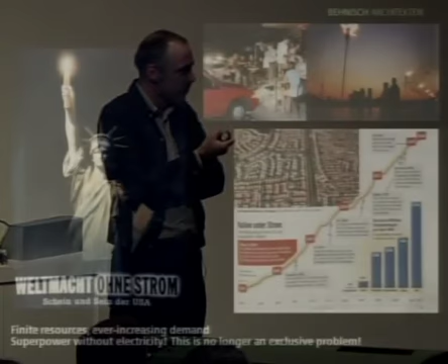And why are we talking about it? Well, some of us talk about it and have been talking about it for many, many years. But the headlines in the press, well, no one can avoid them. We all are now fully aware of the fact that we live on a planet with a finite amount of resources.

So we're encouraged to be good in our daily activities, or you'd like to think we're being encouraged to be good. The problem is that we can't really rely upon morals alone, and there should actually be incentives in place which encourage us to be good. What we've been trying to do these last few years is work out which incentives are actually out there, because then we can confront our clients with these incentives, and it will make our job a little bit easier in getting certain things through on our projects.

There were people who took the lead, or tried to take the lead, many, many years ago. There's Jimmy Carter on the roof of the White House. The problem was that within two years, Ronald Reagan had taken office, and he stripped these off, believe it or not.

At the same time, there were these board games, making the issues really apparent to the public, not just to the architectural community, but to the public.

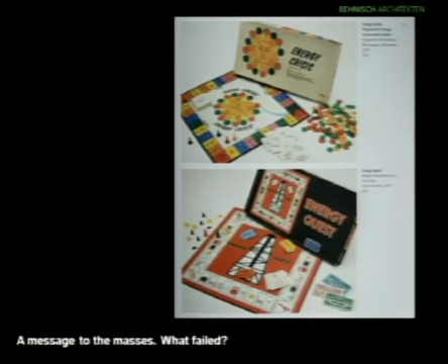What I'm getting at with this is it's relatively easy to use the S word. The problem is it's very, very difficult to actually respond to the S word in daily architectural practice. And it's even more difficult to convince the public at large of what that actually entails in the process of design and construction.

We no longer stop to listen, to hear, or to see. Our knowing so much and seeing so many unfelt images has drowned our sense of the appropriate. That's a great word—appropriate. I'm going to jump to information and disinformation.

Sue Roaf, I think she came and taught here, or gave a lecture here, at Oxford Brookes University. So I'm pointing out that she wrote this, and I didn't, okay?

It's no wonder our job gets quite difficult in convincing clients.

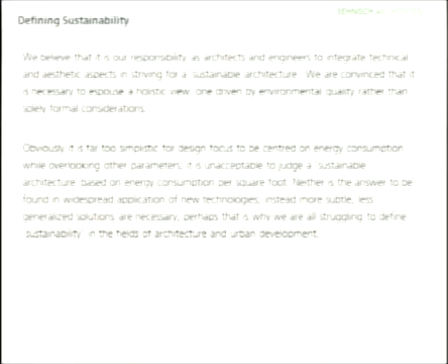I'm going to go past that one, and get to the slide that I showed right at the end last night. Because when I talked about the way that we work in the office, I was alluding to the fact that sometimes we as the architects, because we're in charge of costs and ultimately in charge of the construction site, we can literally conduct a relatively large orchestra over a 3, 4, 5-year period.

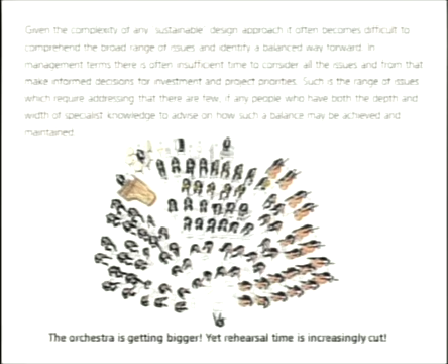The problem is that as soon as you start taking on issues, or you have to convince the client of issues relating to them, you have to take on, at times, more and more members into your orchestra. The problem we're finding, and I think all of our architectural colleagues are finding right now, is that the time we're given by our clients, or sometimes by ourselves because we're putting the time schedules together, to put the project together, to enter into and maintain a dialogue with the clients or with the local authorities, that time is being cut time and time again.

So one of the things I say at just about every lecture is, when someone asks me what I consider the most important aspect in each and every one of our projects, it's that: time. We have to be given adequate time to thrash out ideas which eventually impact upon sustainable design.

I'm going to show you some projects now that you'll have seen and published, and then I'll finish up with 2 or 3 projects that you haven't seen.

This is a project I showed last night. Since I think 95% of you are students, I want you to look carefully, not at the architectural forms, but at the materials we use on our projects, and also at the types of drawings we're doing.

We are not doing sophisticated renderings for the sake of renderings. We're trying to avoid renderings wherever possible. In my opinion, renderings are produced far too often and far too early in projects. A rendering reduced to the form of a sketch that gives an idea is great, but a rendering developed to such an extent that it closes down all avenues of expression or investigation is dangerous, because architecture changes from its inception through to completion. There are so many forces and influences that need to be taken into account after the original sketch. So what we're trying to do is be realistic with our clients.

In this case, this is the Ozeaneum. It's an aquarium, a teaching facility, a research facility - not just a fun palace like the thing down in Atlanta. This is a model, a tiny little model which was made quite carefully, then photographed even more carefully, and then worked on in Photoshop. It's just as good, if not better, than a rendering.

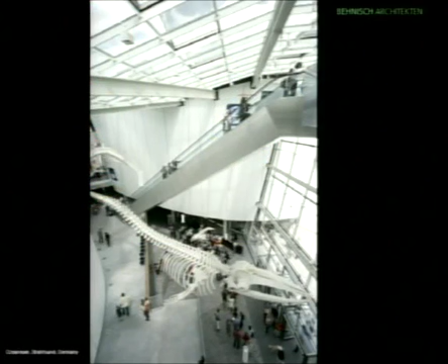The interior - look at the materials: concrete, plasterboard, steel, glass, and a bit of paint. That's about it. These buildings are not expensive. They are spatially sophisticated, but in terms of materials they are very, very robust indeed, be it a school, a bank building, or indeed a museum.

The architectural form is, of course, expressive. It's very, very different to the UNESCO World Heritage Site of Stralsund.

Back home in Germany, we're lucky that the working unions basically define the maximum floor plan depth. You don't have that here, so you end up with deep floor plans. And with deep floor plans, getting natural light and cross-ventilation through these spaces is very difficult indeed. So the rules and regulations back home actually make our life really easy. When you see this and wonder how the hell we did that - it's dead easy, because the rules and regulations are actually beneficial.

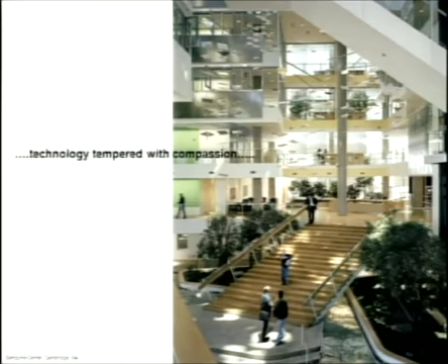So in the case of the Genzyme project, we literally pretended we were working in Germany, and we cut a hole out of a standard American 200-foot by 200-foot block and put an atria in the middle, so we do work with natural light and natural ventilation in a typical American office block.

I should have really shown a slide from Stewart Brand here. I don't know how many of you know who Stewart Brand is, and I'd encourage you to read his new book, which I think is called The Whole Earth Discipline.

Stewart Brand edited the Whole Earth Catalogue, the kind of hippie yellow pages of the 1960s. He then went on—he's a technology freak, believe it or not—and wrote a book I used during all of my studies called The Media Lab, about what goes on in the MIT Media Lab.

And he calls out in his book from the 1970s/80s, How Buildings Learn, for buildings which are robust, loose fit, and... what was the other word I used last night? Robust, loose fit, and not necessarily efficient—but we'll come back to that in a minute. Flexible, thank you.

Now, this is the TDCCBR in University of Toronto, which we completed about 6 years ago, working together with a practice called Architects Alliance.

We were given a site, if you can call it a site—it was a backwater, a cul-de-sac. I don't know how many of you know Toronto: this is College, this is the university complex, this is the big medical services building, a massive concrete bunker built in the 70s. There are a couple of small-scale historic buildings here, and this was our site. It's only 60 feet wide or something, and about 320 feet deep.

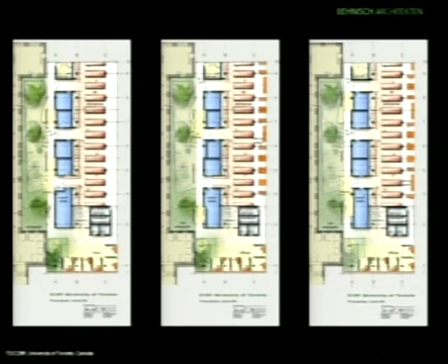But I think, even now, the building form is relatively unimportant. The lab space is shallow plan, so natural light flooding in is absolutely no problem. The nicest thing about the project is the relationship between new and existing—this is the new box, this is the existing building, and this is the space we created.

It's literally a found space. Previously this was used as a parking lot—no one paid it any attention, no one went into the medical science building or through the parking lot.

So we scrubbed up the old building, put a piece of glass over the top, left off the glass here, and created a wonderful communal space.

These are the staircases which are actually missing in this building—staircases which promote communication between the respective departments. I find it quite depressing that you have to go into the fire stairs to move between floors here; we have fire stairs in here too, of course, and if you're not careful you can end up value engineering such things out. But they bring a smile to people's faces when they're being used.

It's the interstitial space which has been turned into a winter garden—a really nice waiting area.

What I'm trying to get across here is we shouldn't be too precious with our architecture. We should promote extensive use, let people almost cannibalize their workspaces so they feel at home in here. I'm not suggesting that I would feel at home in here.

Toronto was interesting because it gave us a springboard with regards to lab design for the Harvard project.

Research is changing from day to day. We don't necessarily have biology researchers, chemistry researchers, physics researchers - everyone seems to collaborate on different projects nowadays. So in each building we have different project groups, and these project groups change in size and intensity literally from week to week. So we're trying to produce an inherently flexible structure, and within each of the structures we have kind of an architectural focus, and that's the communication room.

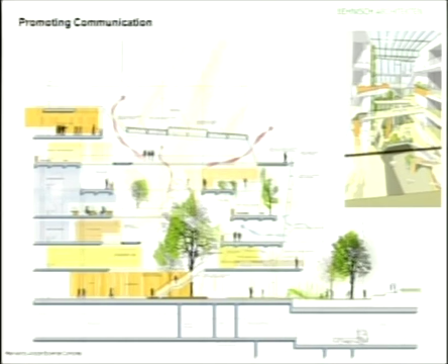That's a sketch model, that's a schematic design. Look at the sizes of the boxes on the roofs - these are the air handling units which any lab has to have, and these are the air handling units on labs which have very much reduced mechanical systems. Imagine how big they would be if we went with a standard approach.

This is a sketch, and it's deliberate - the rendering was actually much more sophisticated, almost photorealistic. We then decided to pull back. We decided that this was a DD, and it would be misleading or potentially misleading to show too much. The decisions still need to be made, and those decisions could only be made through a continued dialogue with the client. So we were still talking about what this material would actually be, what the soffit materials would actually be, what the materials used at roof level would actually be. We didn't want to promise too much too early in case we couldn't afford it at the end of the day.

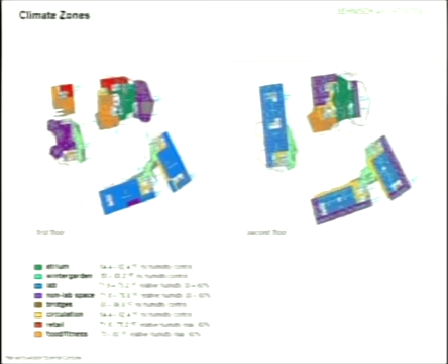These diagrams are interesting because with the help of Transsolar, we managed to change the preconceptions with regards to comfort. We looked at the possibility for rather large temperature and humidity swings throughout the building complex. If you can do that, you can downsize your mechanical equipment dramatically. Temperatures at certain times can get up to 96 degrees, but the reason we allow it is because no one actually occupies that space, or if it's getting up to 78, they might not be occupying that space on a continual basis. So we're looking at how people use buildings and then zoning the buildings appropriately.

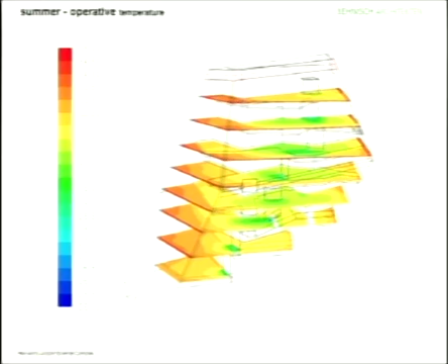So for example, 35 degrees, about 90 degrees, directly at the rear of the glazing in the atria space. Why shouldn't it be allowed to get hot there? No one can walk there, the floor slab is back here. If we can promote a certain temperature differential within these spaces, we can influence the way air moves through them, moving from the cool areas to the warm areas, heating up at the rear of the facade, chimney effect, heat recovery at high level. These buildings have different modes of operation: summer mode, winter mode, and hopefully in the shoulder seasons, almost in passive mode in say 3/4 of the programmed area.

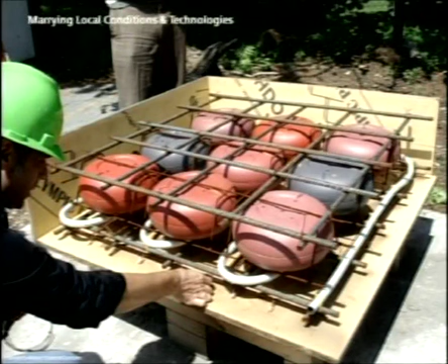I don't know how many of you know this, this is a Cobiax system. It's for reducing dead weight in the concrete superstructure. Project leader Stefan is showing how the Cobiax system can be combined with the pipe work we use to thermally activate the concrete slabs. We had to do this for Turner because Turner were reluctant to take this degree of coordination on board, so we literally did a mock-up and showed them how to do it.

I'm sorry that's in German, but the Harvard project is interesting because through a continual dialogue between ourselves, Transsolar, and the client, we managed to come up with a realistic target to reduce the primary energy by up to 66% compared to any other lab on campus.

And with that, of course, these kind of things got smaller and smaller and smaller. I believe we're starting to take on a different architectural role in the overall composition. They were not necessarily dominating the architectural composition, they became part of the architectural composition.

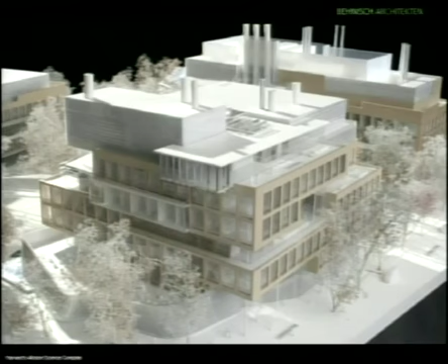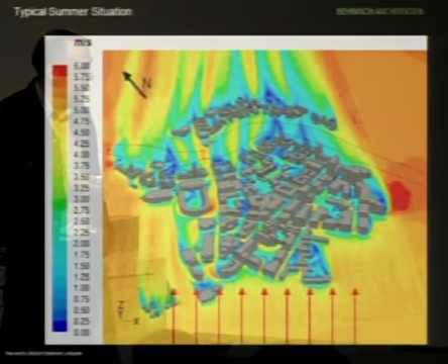With Transsolar, we're getting ever more ambitious, or indeed with Buro Happold. We're looking at comfort not necessarily in the indoor environment, but also in the outdoor environment. This kind of analysis requires rather sophisticated computers. What we're looking at here is wind speed in the spaces between buildings, because there's no point in us talking about putting a cafeteria as a public amenity at grade if that cafeteria or its terrace cannot be used at certain times of year due to the influence of wind. So again, talking about best use or appropriate use of resources. Using this type of modeling, we can anticipate where potential problems may occur.

I don't know how many of you know anything about a thing called deep heat mining. When you talk about efficiencies of scale, the Harvard project allowed us to investigate something rather remarkable. That was not just to look at harnessing the relative coolth or warmth of the ground some 40 meters or 120 feet below the building and put in a conventional geothermal system, but to look at the possibility of dropping two boreholes 1.5 miles into the Earth's crust, bringing up water, or passing water down and bringing it up as superheated steam, and running not just the energy plant for our building, but running the energy plant for the entire campus and turning Harvard into a net energy supplier.

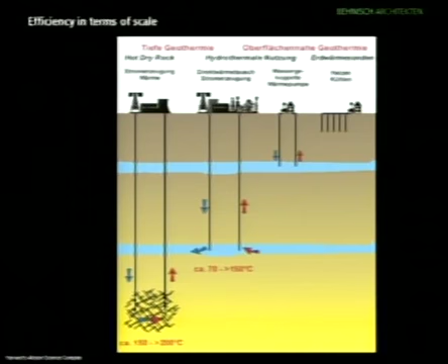That was an interesting conversation that really was, at first, not necessarily encouraged by the university, but because of the time we had on the project and the contacts we had to various people within the university community, it was possible for us to look at ideas about energy supply far beyond the confines of our small 1.5 million square feet.

A so-called fast-track project. That can be rather daunting because if you're not careful, all the avenues of investigation need to be closed down before you start construction on site. But in this project, because of our role as CM, we could send certain works packages out to tender in a staged process, so design and construction were running parallel, on a relatively large project of about 400,000 square feet.

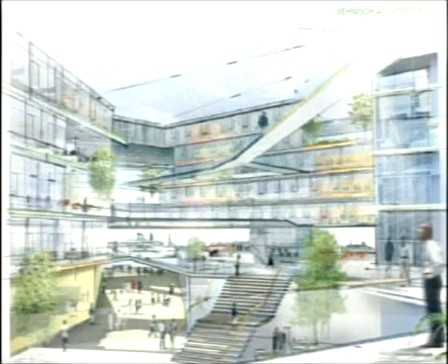This is the work of Morales, and this is the forecourt to our building. Interior perspective - the computer, I think this was mostly Photoshop, to tell you the truth. A SketchUp model and then Photoshop over the top, and then in order to emphasize the ambiguity, sketched again over the top of that. So this is really a collage.

And you can see here the physical and visual transparency through to the harbour. That's the site - one of the largest construction sites in the world right now. A very, very large master plan.

Herzog de Meuron's Elbphilharmonie, which is under construction. OMA's Donut building, the terminal for the big ferries. This is the Queen Mary, which comes in here I think twice a year, and only stays for about 3 days each time. The interesting thing about the Queen Mary is that it has a major impact upon its immediate environment, because this ship doesn't switch off its diesel engines when it's in harbour - these diesel engines work the whole time, polluting the atmosphere.

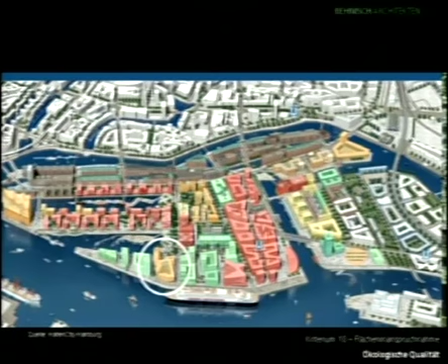I'm going to jump past those because they're not so important. A typical Danish floor plan - the large atria at the centre, terraces opening out to the river. Even the tower, which is in the second row if you like, has great views through to the river, literally by pulling this building back, sacrificing some of the potential square footage at grade, and then putting up an extra floor which wasn't necessarily anticipated in the master plan. We wanted to make sure that this building also had something of the harbour.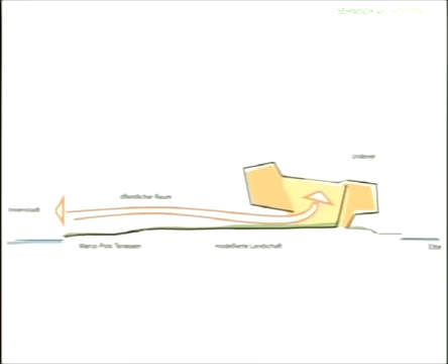The original sketch, to encourage the public into the centre of the Unilever headquarters. The Elbe here, the terraces from Marco Polo here. During the course of sketch design, the rendering got a bit tighter. We still don't really know what the external facade is at this time, or we didn't.

We knew we couldn't afford glass. We knew that a double facade on a building this size would actually blow the budget. But we really wanted to take advantage of the properties of a double facade, the physical properties of a double facade.

At the end of the day, we actually got the building to open, not just towards the city, but towards the water. You can actually walk straight through the building. There's a public cafe here, and this is now one of the most cherished spots on the Elbe, where everyone comes to get an ice cream. The ice cream is what they call magnums, produced by Unilever.

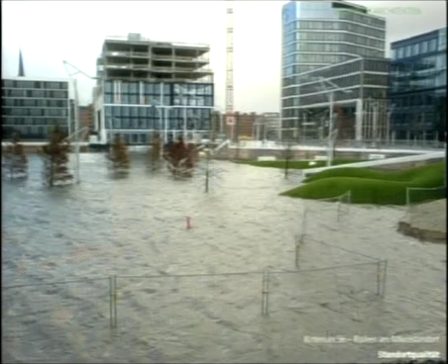You can see the double facade here. The steps are interesting in that they help mask what is a really major problem in the harbour, and that is floodwater. This was during construction. These are the Marco Polo terraces. All of these buildings literally sit either up on legs, or the ground floor is a disaster, nothing other than an opaque brick wall. So anyone walking along the promenade here is, to a certain extent, faced with a brick wall.

There, the public realm is far from animated here. So what we tried to do is to bridge that 8.6 meter jump, that's 27 feet, with a series of terraces or a series of steps.

What we wanted to do was to still work with external sunscreening devices. The sunscreening devices occupy the interstitial space. We couldn't afford glass, so we started working with membranes—single skin ETFE membranes stretched over a frame and then tensioned via a series of cable stays.

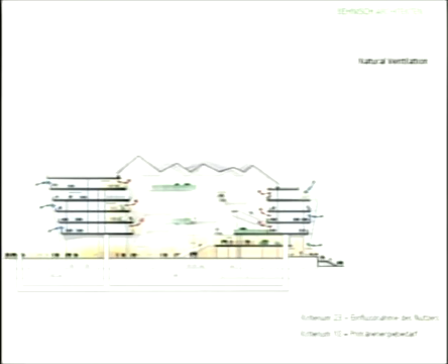Of course, during the time that the Queen Mary is in there, the building operation has to change. If you open the window, you're not only allowing fumes in, but the noise of these diesel engines renders the workstations basically unusable. So this is a mixed mode building as well, but mixed mode not in terms of the season, but in terms of whether or not this thing's in there or not.

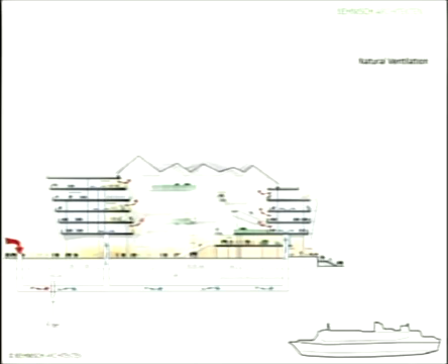We have an earth channel so that the air is tempered before it goes through the mechanical plant—it's either pre-warmed or pre-cooled. The air is then introduced through a raised floor. We don't have any drop ceilings, because if we had drop ceilings, there would be a negative effect upon the exposed thermal mass. And of course, we allow the warm air to rise through the atria, and we collect the warm air at high level through a series of heat exchangers. That's all common sense, and you guys talk about that. Go to other universities, you don't hear a word about this stuff.

The stretched skin—I think there's a building by Fox and Fowle in Times Square, but it's only done over a relatively small expanse of the building facade. This is the largest single skin membrane in the world, but it gives the building a rather unique appearance. It's self-cleaning through the lotus effect, and its dead weight is remarkably low because it's so thin.

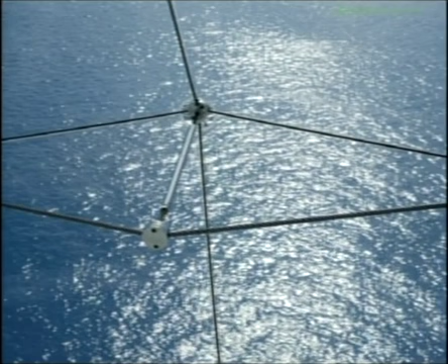It's pretty transparent as well, and it has to be, otherwise we would have complaints from the workforce. That's the view through the window, through the double facade towards the water.

Seen from an acute angle, obviously, due to the stretch, it gets a little difficult. But here you can see the main reason for doing it: external sunscreening not adversely affected by the wind, highly efficient, and remains clean as well. So the blades are also reflecting light in onto the concrete soffits.

Ground floor, as I said, is open. It's very much like a street in Hamburg.

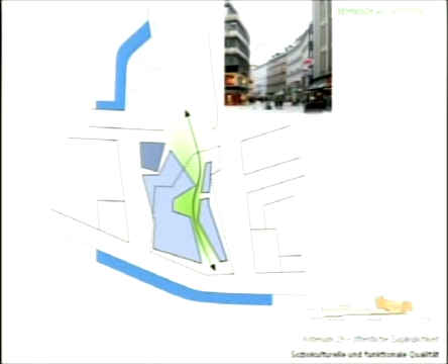Ground floor is open to the street, and it's animated by public amenities. The building, the Unilever headquarters, really starts at second floor. At ground, we have the Dove Spa, another Unilever product, the supermarket selling all of the Unilever foodstuffs, the cafe up front, and then we have kitchens.

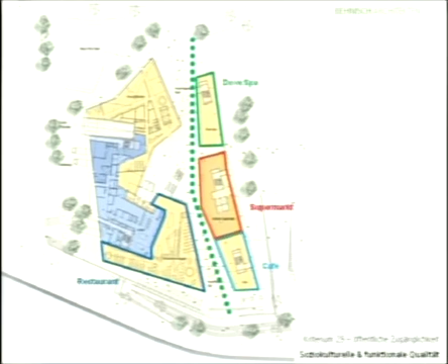These kitchens are actually kitchens where you and I can go in and learn how to cook with master chefs. So these are demonstration kitchens. And then there's a restaurant, which at the moment is a staff restaurant, but it will eventually be opened up to be used by the public as well. So the entire ground floor is basically publicly accessible.

Center is flooded with light. LED lighting throughout. We've been experimenting with LED lighting for the best part of 8 years, working together with a manufacturer in Stuttgart, who's actually a friend of the practice. So all workstations and all feature lighting in here is LED. I don't think there's a bigger building on the planet with LED throughout.

Acoustic qualities also have to be taken on board. Therefore, the spandrel panels are acoustically activated. Otherwise, all of this glass would have a negative effect, and the hard surfaces, the robust hard surfaces, would have a negative effect upon the acoustics.

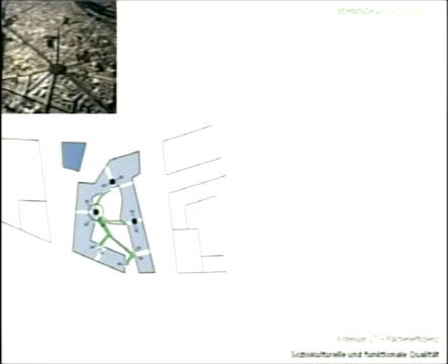It's all common sense. It's a city. We all know how cities work. This is our building. It works like a city. There are places for exchange of information. Some of them are big, some of them are small.

Some of them are just a tea kitchen. Others are a tea kitchen plus a copy center, plus what is the most sought after meeting room in the whole building. And it's not a meeting room which is kind of enclosed. It's something which is very, very open.

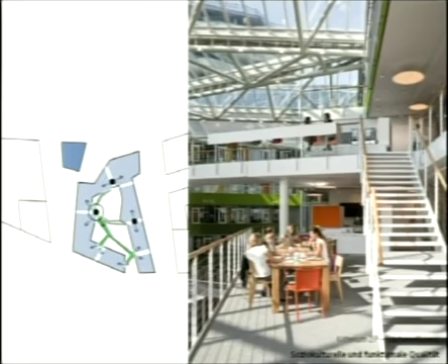Write-up spaces, where you can just sit with your laptop and work in a manner which is radically different from the traditional cellular office.

And that's the resulting space. Materials are simple: concrete, plaster, steel, and timber. That's it. I mean, we're not going to talk about that, or that, or that, or that.

Exposed concrete soffit, as I said. Typically, that would bring acoustic difficulties. In this case, we worked with an innovative flooring product, so the fresh air is coming through the floor, but the floor is also acoustically activated. They're like carpet tiles fixed onto these micro-perforated concrete panels, if you like.

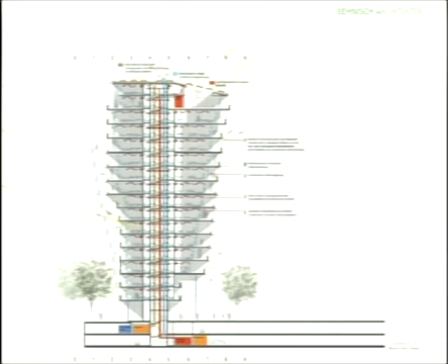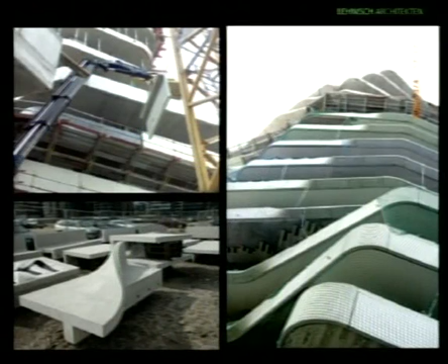It's approaching completion right now. This is taken about 4 months ago. It's rather complicated, but most of it's prefabricated. The erection procedures are rather difficult. Because of the cantilevered building form, it's very difficult to hang everything in. Things literally have to be plugged in from the side. That's rather difficult.

The lobby area. The materials are a little bit more sophisticated than what we would normally be working with. But this is high end. These units, because of their location, not necessarily because of anything else, I think purely location, where we have 360-degree views over the entire city of Hamburg. These units are selling for 12,000 euros a square meter. These are New York prices, though, still.

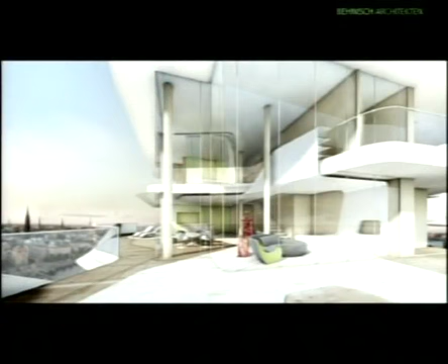Right now we're in the process of fitting out all 49 of the units, and we've actually only ended up getting 3 of them. Each of the owners has brought in their own architect or interior designer. We offered our services, but not surprisingly, the purchase agreement, the Kaufvertrag, left it open so that everybody could bring in whoever they wanted to work with.

Another project approaching completion, I need about 10 minutes. It's the National Cancer Clinic in Heidelberg.

Cancer in Germany is treated rather differently to the way it's treated in the United States. Traditionally, if you have a problem, you go to see one doctor, then you get sent to see another one, all in remote locations. You seem to have a thing called comprehensive cancer treatment here, which means you go to one building and these doctors or consultants tend to be located in that one building. Which makes sense. So what we're doing here for the German Cancer Foundation is to build a pilot project where...

Research in the form of labs, treatment, consultation, and communication between doctors and consultants will all take place in one building. The building is only 110,000 square feet, so it's small. It's over 4 stories, but the project has a very, very complicated program.

And you're going to see that right now. That's a rendering we've been using up until the final day. We still haven't, even though we're under construction and will be complete in a month, done a photorealistic rendering. It's just got a little bit more realistic as we've gone on, but we've been very, very careful.

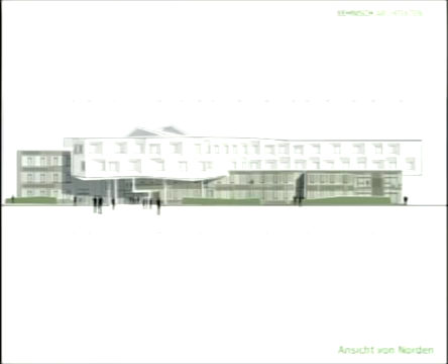These are the roof lights to the central atria, and they're facing north, of course. And because of the geometry of the building, the elevations start to look ridiculous. But of course we're charged with producing the north, south, east, and west elevations. I think it gets rather interesting, the discussion about those type of drawings when you're working with these kinds of geometries.

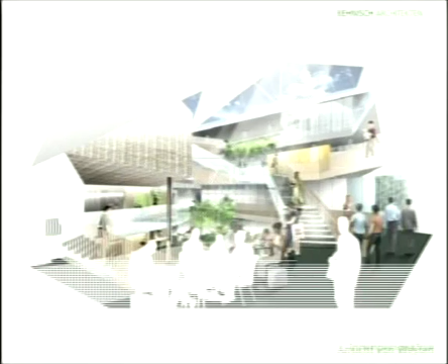Again, interior perspective, it's a photo montage, a very, very quick SketchUp model, then worked on over time to convey a mood or atmosphere. Again, we're shying away from being too precise. The reason for that is because we're still not sure about the spacing between the posts to the balustrading, or still not sure about what kind of handrail we have. So there's no point in putting it in there.

And subsequent to that, we went back to this kind of stuff, which is even more direct. All we're trying to do here is explain to the client, to the users, where these different materials actually are - where we have timber, where we have glass, where we have natural stone, where we have carpet.

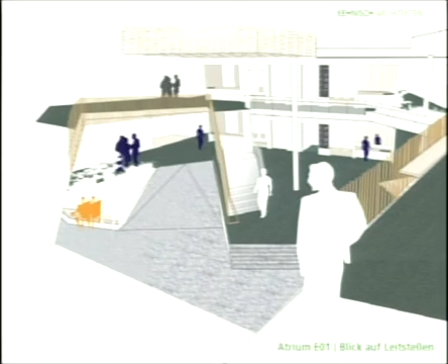Where we have the need for signage, where we have a change in materials at a desk.

And if I may, this is what I would encourage you guys to do. There's no need to render. It doesn't do anything, it just consumes vast amounts of time.

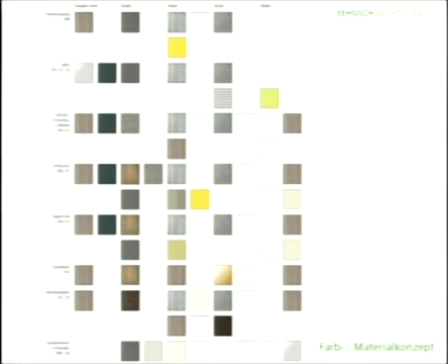The palette of materials and colors used throughout the building is deliberately restrained, because otherwise, together with the geometry, it would be just far too much.

I think this is the last one. No, there's two more. We'll be finished at 7, okay?

We were charged with putting a roof over that without any columns, and at the same time we were charged with leaving the concrete circuit in there because of the high degree of servicing which is actually embedded in this concrete. This all has to be done by February of next year, because then there's a run out for the next World Championships.

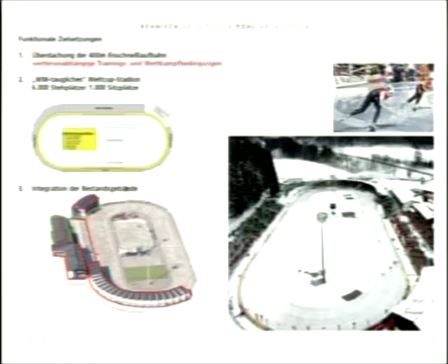So we're trying to bring in daylight, I say daylight and not sunlight, because sunlight will impact upon the ice quality. That's another reason why they're moving indoors, because the ice has to be perfect. If it's not perfect, then they can't set world records there.

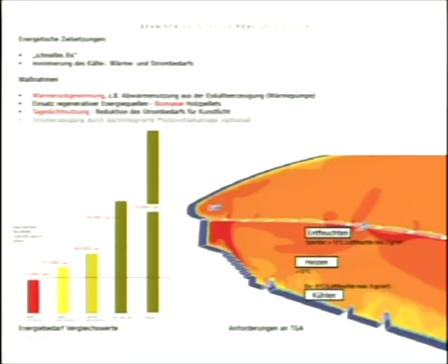And of course, these things traditionally consume vast amounts of energy. What we're really interested in here is bringing in natural daylight in order to improve the experience, but also to reduce electrical loads dramatically.

At the same time, we want to ensure absolute optimum temperature and humidity conditions in the various parts of the hall, so different temperature and humidity for the audience compared to that directly above the ice.

And if we're not careful here, we end up with problems associated with fog building over the ice. If we get fog over the ice, then the cameras can't see the skaters going around the corners or around the curves. So we've got in some really, really sophisticated modeling.

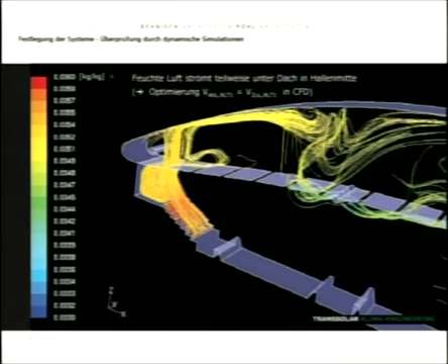We're looking at low E membranes as well in order to ensure that the structure is not adversely affected, and we want to avoid condensation buildup, because there has been a problem in the last few years with one of these halls actually collapsing.

We wanted to bring light into the hall, so we wanted to introduce some shed roofs. We're looking at a rather distinctive geometry with this oval form, and it was getting rather complicated in terms of bringing light in and holding sunlight out. We started modeling, and we were worried that the roof may end up turning into a kind of lemon meringue pie.

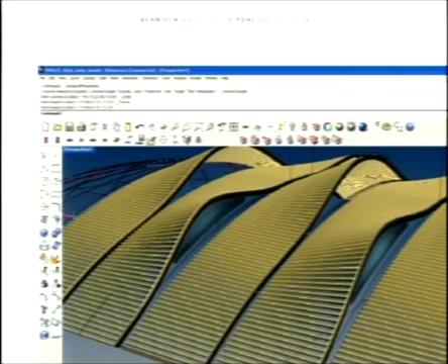So we got into Rhino, and we got into Grasshopper, and we started to look at how we could modulate the roof using remarkably similar length elements out of timber, 20 feet long, creating a series of ripples in order that we could bring north light in without having too many different pieces of a jigsaw.

And we ended up with a roof that looks like that. So there's a degree of repetition in there, a degree of standardization. These spans are enormous, 270 feet. The trusses are 8.5 meters high, which means they are nearly 30 feet high. The roof is made almost entirely out of timber. Only the tension elements along the bottom are actually made out of steel. These are being fabricated right now in a local shop.

That's what the thing will look like. It's absolutely enormous. These houses are big. Any of you who've been to the Alps know that the traditional farmer's house is very large indeed, because the farmer and his entire family and three generations live in them, and the cattle sometimes. But this is still absolutely enormous.

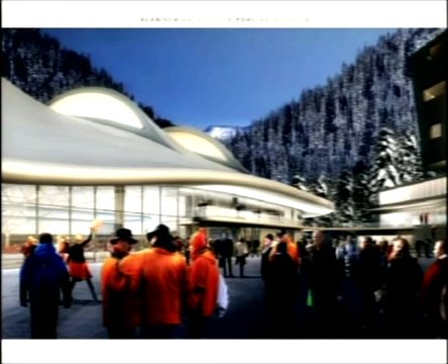These are the fans of the Dutch ice speed skating team. And this is the low-E membrane, which is to a certain extent translucent, so you're going to see the structure through it, and the daylight is going to bounce around in this interstitial space between the low-E membrane and roof. Importantly, there will be no light spots on the ice. We'll have very, very level and even lighting across the entire hall.

And now I want to show you the last project. We've got five minutes. Riyadh is the capital of Saudi Arabia.

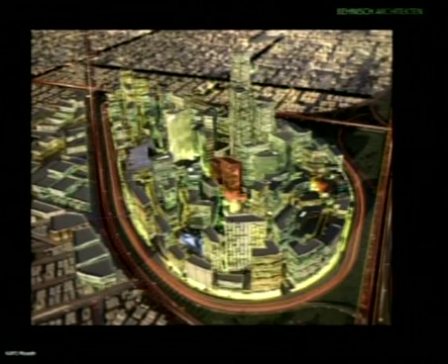And we're doing a project. That's our project, one of 80 sites. We're this little one here, we're 80 meters high. Some of them are 330 meters high. Foster's doing five buildings here, Will Bruder's doing one project here, we're doing one, SOM are doing three. There are about 20 different architects doing various numbers of projects at the center of the new financial district in Riyadh.

The interesting thing about the project is that we were given a rather peculiar site. Other people got much easier sites to a certain degree. Let's go back. We kind of got this relatively shallow site that's pinched at the middle.

We're fronting onto the wadi, and I think some of you will know what a wadi is - that's basically the area that floods under the impact of torrential rain, for a very short period, in the desert climate. So here we have a kind of zone which will be rocky, with certain trees and shrubs.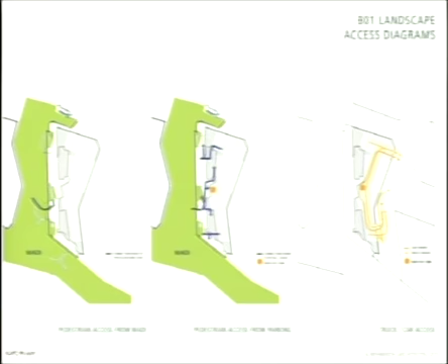This is something like 20 feet below the main entrance level, which is on the other side of the building. Here's the main entrance level, the financial plaza. This is literally a gorge between this building and this building, so at certain times of the day there will be absolutely no sunlight in here. The master plan is put together by Henning Larsen, and the idea really is to create shadow as much as possible.

Now, the reason for showing this is because I'm trying to get across to you guys how simple the drawings are - how we make our point to the client, how you move through the buildings, how you enter the buildings, where the control points are at the buildings, pedestrian access, truck or car access at a lower level.

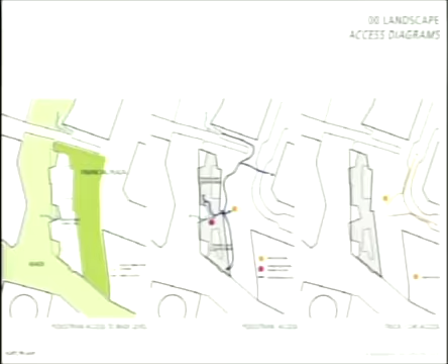Going to go past that one, go to that one.

Taking a rather complicated drawing in terms of surface texture, but really getting the story home to your granny - how you go through this building, where the main entrance is, where the control points are, how you get from here to the main lift core, how you can possibly go through the building and down the stairs to the wadi, how the drop-off works - not leaving anything open, getting the story across as quickly as possible. You can dive into that if you want, but once you've got that, everything's literally explained.

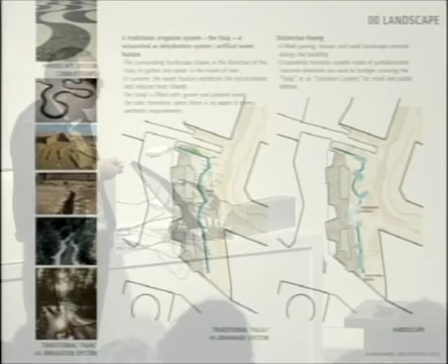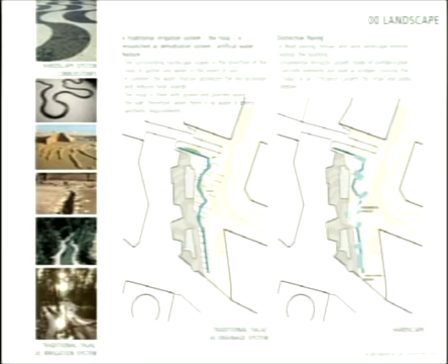Then getting rather sophisticated with the external works, the treatment of the landscape, referring instead of imposing a new form of landscape onto a desert climate - looking for clues in the existing climate, looking at how we can deal with rainwater runoff. When rain comes, it comes torrentially. We use a small channel as a threshold, so instead of referring to the line of the curb as our threshold, this area here belongs to the financial plaza, this area here literally belongs to our building. So there's a discussion about private and semi-private here.

Because of the desert climate, the building is also connected to its neighbors at third floor, so there are a series of bridges. The outdoor world is not used to the same extent that it's used here in Portland or in Eugene - it's just not possible, it's just too bloody hot.

So we're now charged with taking other people's geometries on board for these rather difficult bridges. We have now a public realm within the building, and this public realm is then animated by shops, kiosks, restaurants and indoor gardens.

It's said that we had a very strange site - the strange form of the site saved us from doing a deep plan building. We'd have probably tried to avoid doing a deep plan building because of the problems associated with natural light. We obviously want to get as many of the workstations at the facade as possible, but in this particular climate we have to be careful about putting too many workstations at the facade, because if you're not careful, the glare is intense.

So you see here, on all sides we have our baseball caps. But even workstations some 12 foot from the facade have got direct visual connection to the outside world.

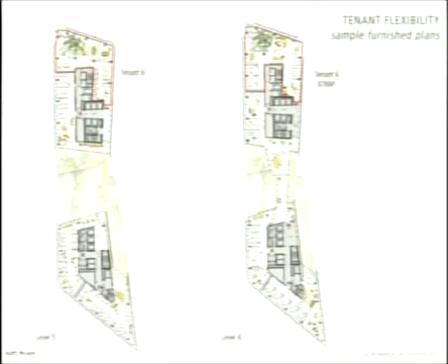The interesting thing about the building is that at the moment there isn't a tenant, so we kind of invented a narrative for the building. We've said it can be used in any one of a number of ways - this didn't come from the client, this came from us. The client just wanted a certain amount of square footage, we've said that's not good enough. We need to anticipate how this building can be used, we need to anticipate multiple tenancies, we need to talk about how people could possibly walk through this building. Otherwise we're just going to end up with a kind of a donut building with just repetitive floor slabs, and we said we're not really interested in that.

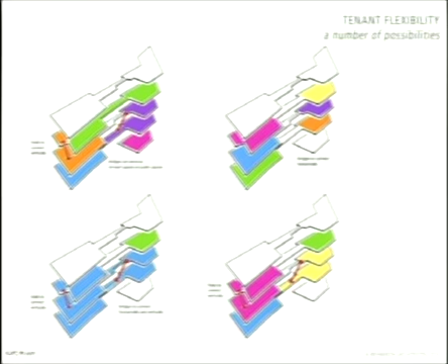We have to offer the users different ways of moving through and working with this building. So you see the different colors here represent different combinations of tenancies, be they over single floors or over numerous floors, in the north tower or indeed in the south tower, as I refer to them.

The gardens and atria spaces provide connections between these various tenancies - the north tower and the south tower. The connection between the entrance plaza and the wadi is then taken even further, and we're actually trying to forge connections between the wadi and the bridge links to the neighboring buildings.

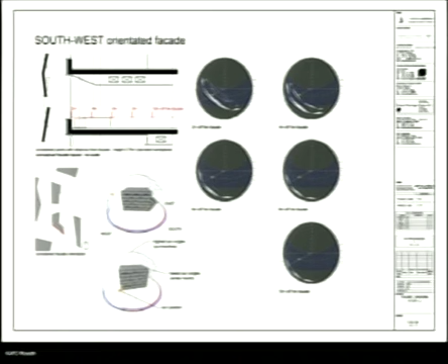We're working together with Buro Happold on this one, not with Transsolar, and we're working with Bartenbach in terms of lighting. So we're putting models in artificial skies, and we're also doing daylighting analysis, trying to cut down on glare, trying to get daylight into the floor plans or into the depths as much as we possibly can, reducing the reliance upon artificial lighting.

While maintaining, of course, views out. So we have a fairly mundane facade, thermal envelope, unitized system, and then we have these things thrown out front, my baseball caps, and we have three different types of openings depending upon exposure and depending upon relationship to neighboring buildings.

It's also important, this is the important view, the view down to the wadi or to the entrance plaza. The view up to the open sky is dangerous, of course, because that would allow sunlight into these spaces, which would then overheat dramatically quickly, and we would then have an increased reliance upon the mechanical systems.

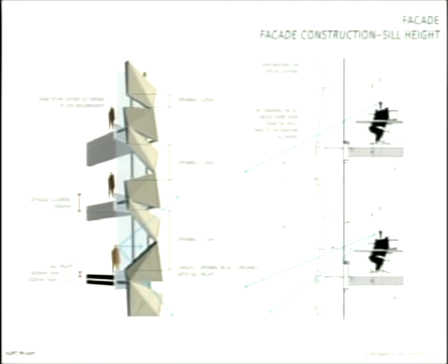So these are the investigations that we're undertaking at present, actually looking at perforating some of these elements in order that we get more even distribution of light.

The renderings for this particular client are more sophisticated than we would normally undertake at this stage of a project. But even here, we're still trying to shy away from the photorealistic. The easy trick: the day and the night.

And that's where we are right now. We're still designing, we're in schematic design, and the thing is under construction. And so are all of these other buildings all the way around, which is rather scary. They're cutting into bare rock for the basements.

It's quite difficult, I think, to actually talk about or to show that after talking about a project or showing a project in Riyadh, because basically you ask yourself, why the hell is anyone building in Riyadh? It's such an extreme climate. But even when we do build in Riyadh, then we are still charged with asking or posing those questions.

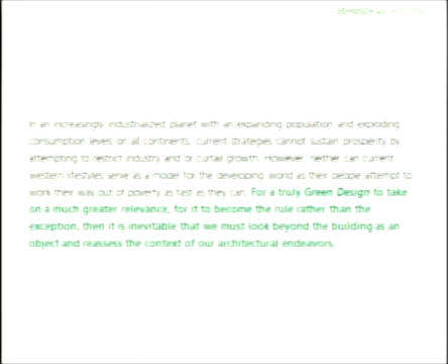Okay, we'll go to... oh no, go back. Okay.

Because this is the kind of stuff that we've been talking about in studio and in seminar, that we've been saying that working on a scale of an individual building is not actually that helpful, that we should be looking to work at larger scales if we really want to make a difference.

We can't really start from scratch. There are too many cities around that need, or problems in existing cities that need addressing first. Therefore, we're trying to establish, and also in seminar, we're trying to establish appropriate mechanisms for the adaptation of cities, to create what could ultimately be a more sustainable city. I'm not saying a sustainable city, because I'm not necessarily proposing that exists or can exist.